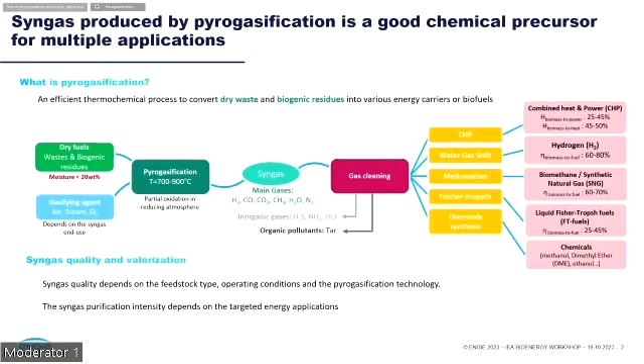Gasification is a kind of super-ordinate term, but a wide variety of different gasification technologies are available on the market. The selection of the technology depends on a number of different factors, and of these, the most prominent are the selection of the feedstock, the end product, and the scale of production.

Fluidized bed, either single bed or dual bed, is used in medium to large-scale applications ranging from around 1 to 100 megawatts. Fluidized bed gasification enables more complex biorefinery processes with downstream gas upgrading equipment, and can produce, for instance, SNG, hydrogen, chemicals, and liquid fuels.

The same is true for entrained flow gasification, which is typically applied at even larger scale, above 100 megawatts. They are more particularly suitable for liquid fuels and chemicals because they produce a high hydrogen content, and also because there is a kind of economy of scale, making them more suitable for higher price end products.

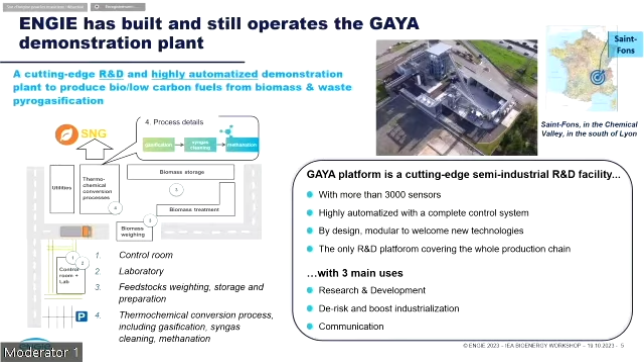So the GAYA project was co-funded by ADEME within the framework of the Call for Expression for Interest and the second generation biofuel demonstrator fund. It gathered 11 partners and was coordinated by ENGIE, and the objective was to demonstrate the bio-SNG production from biomass gasification at the beginning, and at the end of the project, we also performed some tests on waste, such as refuse-derived fuel.

You see the timeline on the right. So basically, we started the project in 2010, and we started the operation during 2018. And we are still operating the GAYA platform, even if the project with ADEME ended at the end of 2021.

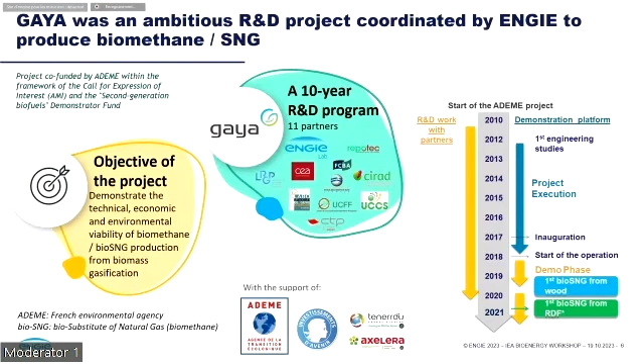Here are some main results. For the technical parts, we have demonstrated the overall process chain, and we have performed more than 150 tests. We have performed long duration tests, so we are confident in this process chain.

Also, we decreased the production cost compared to the state of the art, thanks to several innovations and more than 10 patents. So compared to the state of the art, we decreased the capex by 30%, and also we decreased the feedstock supply costs by using lower cost feedstock and waste. And also we confirm that this pathway has an environmental benefit.

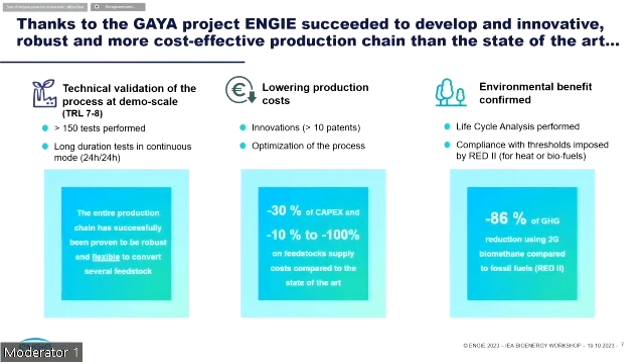For the biomass conversion, you see the number which was assessed and validated by an external panel of experts, and we are doing the same for the waste valorization. So the GAYA project helps to go from the lab concept, and right now we are at the industrialization step.

So the first commercial plant will be the SALAMANDRE project. The capacity of this plant foreseen is 20 megawatts, and you can see here the first sketch of the commercial project. This project will be based in the harbor of Le Havre in Normandy.

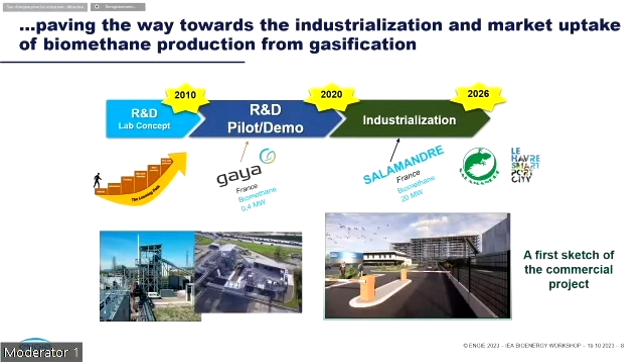So here are some figures about this project. Basically, we will produce 170 gigawatt hours of SNG and also 11 kilotons per year of synthetic liquefied natural gas for heavy and maritime transport, and also for intensive industries around there. And we will co-produce also 40 gigawatt hours of renewable heat that can be used either for industries in the form of steam, and also for urban networks.

And we want to valorize 70,000 tons a year of non-recyclable waste, mainly wood waste and solid recovered fuels. And beyond that, we also want to create synergies and increase the amount of carbon contained in the initial feedstock in the final product.

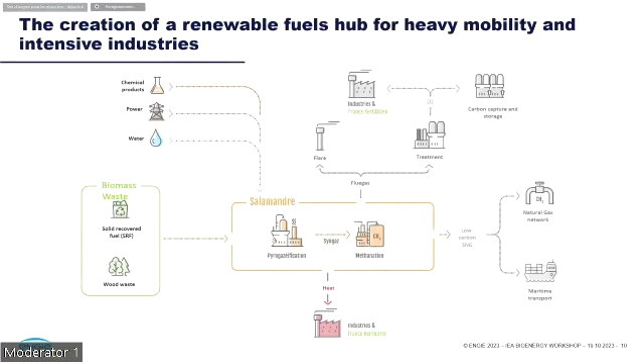So the GAYA platform is still operating, and we are very open, and we collaborate with partners also at European level in order to continue to validate innovative solutions, either for syngas cleaning, catalyst, syngas conversion technologies, and also SNG upgrading technologies. We want to pursue our feedstock diversification.

In particular, we want to address more and more non-recyclable waste. And also we want to diversify the application. So basically we would like to go to hydrogen or co-production of hydrogen and methane. And also I will present you right now a brand new project which was granted this year, coordinated by TNO, in which we are a partner.

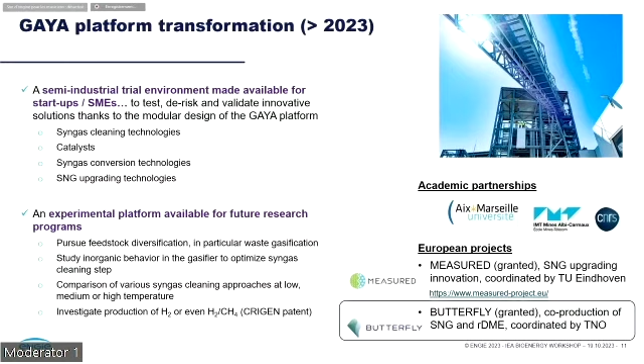So Butterfly comes from biomass utilized to the extended portfolio of renewable fuels with large yields. So the objective of the project, which was launched in July this year, is to co-produce renewable dimethyl ether and SNG, applying, for instance, hydrogen produced from electrolysis in order to produce these two products at a tunable ratio by converting the CO2 coming from the process chain. So we want to diversify also the feedstock.

We will address lignocellulosic biomass, industrial waste, and also upgrading wet organic residues. We will valorize then the RDME and SNG for off-grid energy supply, maritime and heavy-duty transportation, and also for the steel industry.

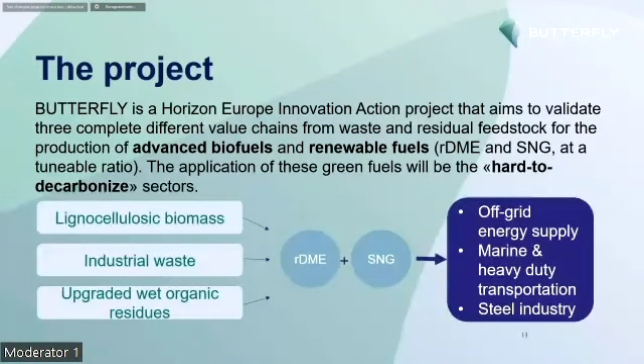So the concept is we will use part of the Gaia process chain with the indirect gasification, the syngas cleaning, and also the methanation. But within this process, we will integrate a new technology brought by TNO called SEDMES, a sorption enhanced DME synthesis reactor. So we will co-produce DME and SNG at a tunable ratio, depending on the demand, for instance more SNG in winter to produce heat, or for other reasons. That's the goal of this project: to study the best optimum in technical, economic, and environmental aspects.

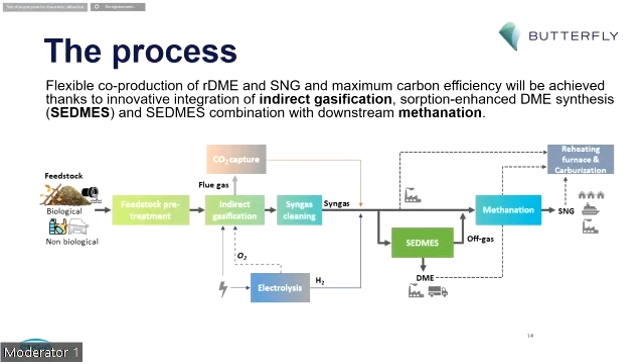So the goals are to improve biomass to fuel conversion efficiency by 15%. We will achieve up to 97% carbon efficiency, and also optimize the synergy of RDME and SNG production.

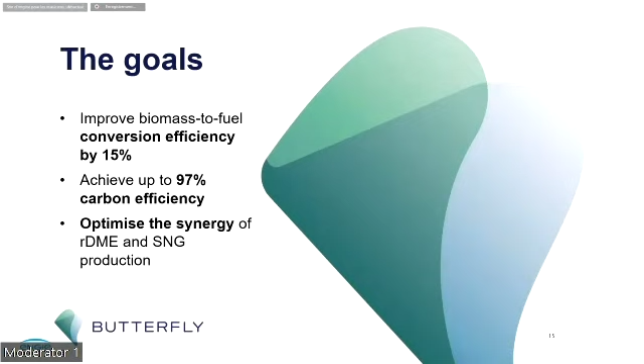Here you can see the different partners of this project. TNO is coordinating, and Politecnico of Milano is also part of it. Lots of partners, either for feedstock supply and logistics, for the conversion demonstration, and also for the final application. For instance, for RDME, DMETA will study the DME market, and some partners will also study DME application in industry.

So thank you for your attention.

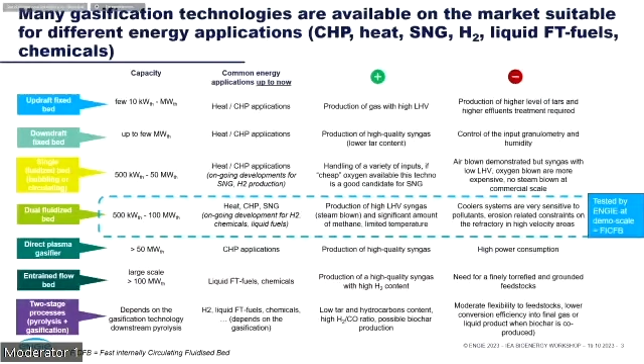Hello, Nicolas Bijon from Solagro. Thank you for the presentation, it's very interesting. I had a question about the use of refuse-derived fuel, both in the Gaia process and in the future Salamandre process, and several questions about that. First, did you achieve sufficient cleaning of the biomethane for injection in the gas network in Gaia? And is it a use that you plan to pursue with the Salamandre project, or are you going to take RDF there? And if so, isn't the RED II directive from Europe a problem for this type of fuel, since part of it is not biogenic?

Okay, so three questions. Yes. So the first one is - basically, if you guarantee a very clean syngas at the end of the syngas cleaning step, then the methanation part won't create any new pollutants. So it's not because we have biomass or waste at the beginning of the process that the final SNG quality will change, because the methanation is a catalytic process. We have to do the main job before the methanation. And yes, we have performed exhaustive analysis on the final SNG coming from SRF or RDF and also waste wood, and we see there isn't any change in terms of quality compared to biomass.

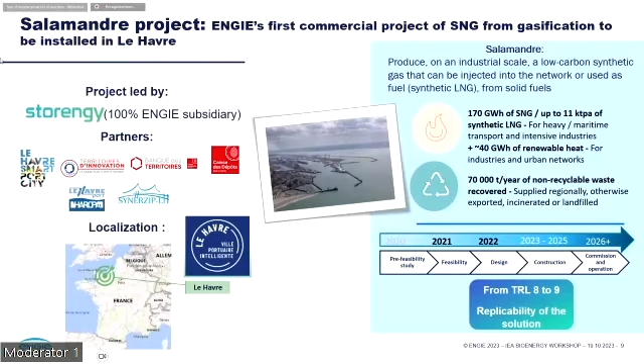Thank you, Marion, and thanks also to all the ENGIE team that will assure tomorrow the visit of the Gaia plant for some of our participants.

So our next speaker is Joakim Lundgren. He is professor at Luleå University of Technology. Besides that, he has several other positions, but I think being the deputy director of CHES is probably an important one also for the presentation he's going to give. He's also the representative of Sweden in Task 33 and in charge of all our activities related to hydrogen production via gasification. The floor is yours.

Thank you very much, Berend, for the introduction, and thanks for letting me talk today, very appreciated. I will discuss hydrogen, which is very hot, but not through power-based hydrogen production, but from biomass and gasification in particular.

Somebody said today that AI is the flavor of the month. I would say that hydrogen is the flavor of the year. Definitely, it's extremely hot, and if you follow the news, there is simply large news on investments and large projects more or less every day. It's about hydrogen-driven trains, aircrafts, new steel plants that will be based on fossil-free hydrogen. I had to put in one of the news on Sweden, where steel making using fossil-free hydrogen is very, very interesting and hot. Now it seems like we're also planning for steel production in Canada using the same concept with DRI. So very, very hot.

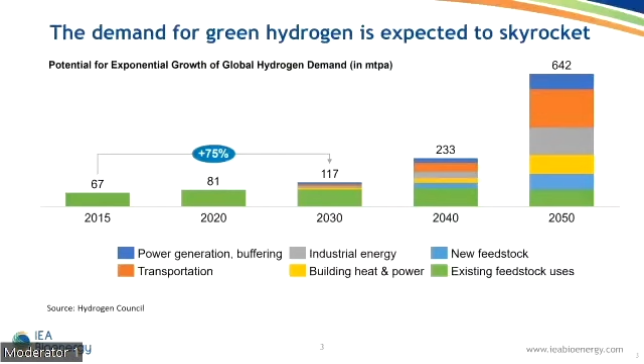So I think there is a consensus that the majority of the production of fossil-free hydrogen will most likely be electrolysis and power-based hydrogen. But I'm a little bit annoyed, if I should be honest, when you directly convert the demand for hydrogen and translate that to how much power you need by just dividing by 0.7, completely forgetting that there are other technologies as well that can supply the hydrogen.

I'm also a little bit skeptical of these colors, different colors of hydrogen. As you can see here, green hydrogen is electrolysis using wind, solar, hydro or geothermal. Gasification is mentioned, but then it's black or brown when you use coal. So if you aim at using biomass, there is no color that fits very well. I would definitely count it as a green one, but it's a little bit unfortunate that it's overlooked — biomass-based hydrogen in general. Today I will focus on my favorite technology, gasification.

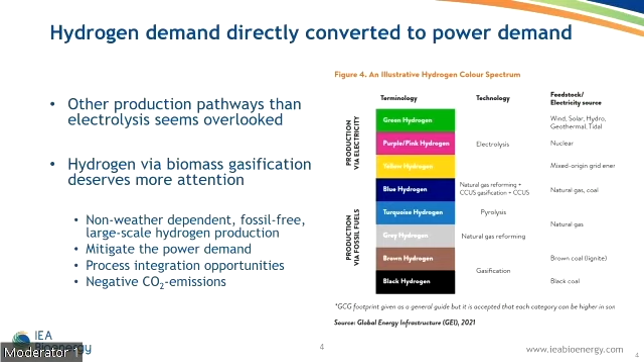So this is what I will focus on today. Marion presented this much better than I could - the technologies for gasification and the characteristics, that it's very flexible in feedstock, but also very flexible on the final product side. So I will simply skip the technical things because Marion already covered it.

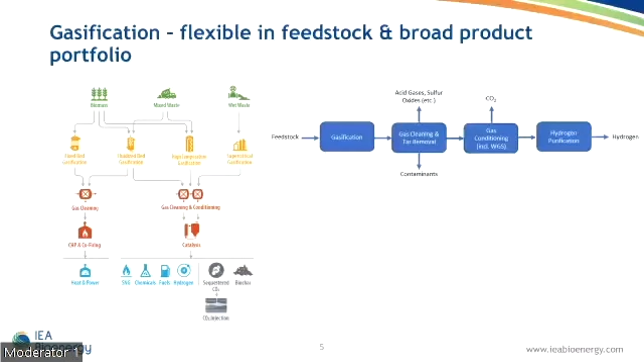This is a very rough sketch of the process for producing hydrogen via gasification. I will not go into details here, but I think most of you are aware of the processes needed. You need to get rid of some nasty stuff that we don't want, like acid gases and sulfur and other contaminants like particles. Then you need to make the gas a little bit better by conditioning, and also remove the CO2, very important, and then purify it with, for example, PSA to get a high quality hydrogen stream.

But important here, a very rough mass balance is that if you gasify 1 dry ton of biomass, you can produce around 100 kilograms of hydrogen. At the same time you produce 15 to 20 kilograms of CO2 per kilogram of hydrogen. So these are very, very rough balances.

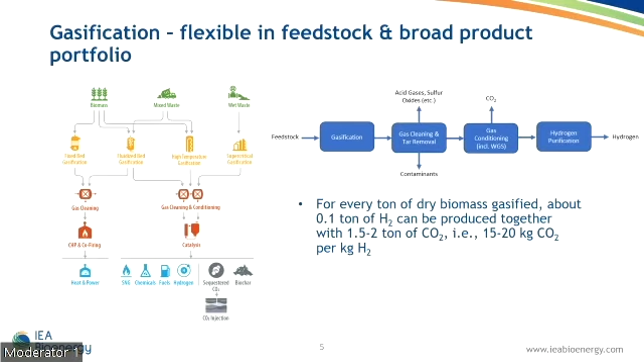And I will not focus on the technical things now on producing hydrogen. I will more be focusing on economics, which I think is quite interesting actually. And I've used an IEA Bioenergy publication. I don't know if there are co-authors, but I know that people in this room have been involved in this report.

This report doesn't include hydrogen, but it's a relevant assumption to say that the production cost for methanol and methane via gasification will be roughly the same as gasification-based hydrogen. It won't differ that much. In this report, they presented production costs for these commodities with different scenarios, one higher cost and one lower cost. I also took the freedom to extrapolate with different feedstock costs. I think the last time I checked feedstock cost for biomass wood chips, it was around 25 euros per megawatt hour, something like that.

Competing with fossil-based hydrogen is not easy. This is rough cost for hydrogen produced today via steam methane reforming, somewhere around €1 per kilo up to maybe €2 per kilo, somewhere there. And what we can see is that at current conditions, it will be very difficult for biomass to compete with this.

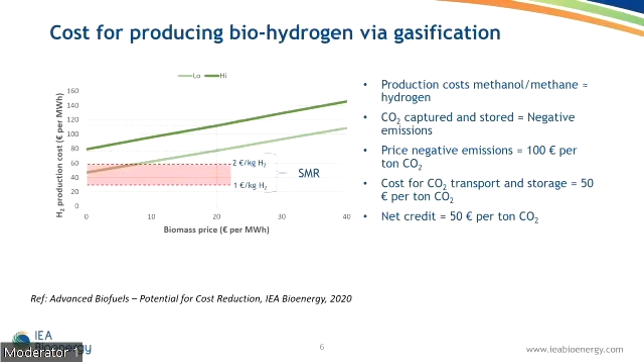Using the numbers I presented before, it means we can push down the production cost quite significantly. I have now compared with SMR coupled with CCS to make it a little bit more comparable. What we can see then is that it's becoming improved. Following the high cost scenario, it will still be difficult. But with the low cost scenario, according to the IEA report, with feedstock prices that we have today, it actually starts to become feasible.

Even though I don't think it's perhaps extremely fair to compare these two costs.

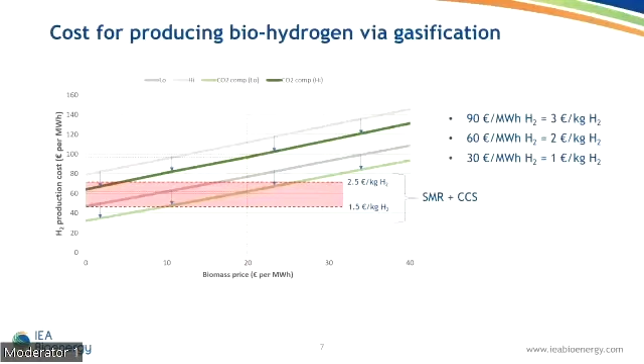And it's exactly the same, not only with green hydrogen, but green technologies in general. They need support before they can compete with fossil alternatives. So that's, I think, an important message.

So what about competing with power-based hydrogen? Well, according to my calculation, this is also from IEA Hydrogen, on the estimated cost for solar and wind-based hydrogen 2040 to 2050. And if I put in my estimations of gasification-based hydrogen, it's somewhere around in this span, $2 to $3 per kilogram. And what you can see here is that in the Northern Hemisphere, it's competitive also to power-based hydrogen. So I think this is actually quite promising also from an economic point of view.

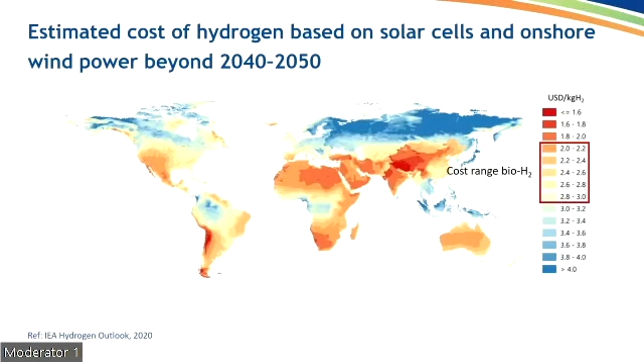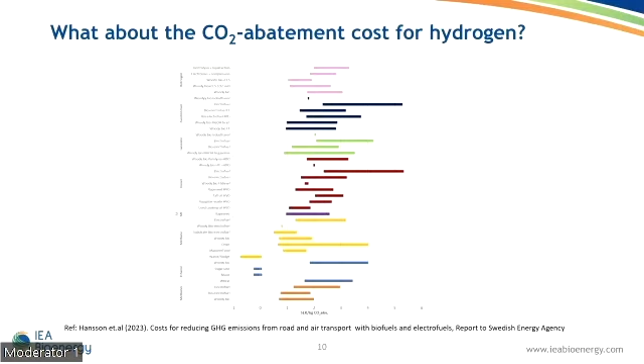We have also calculated the CO2 abatement cost for a large number of transportation fuels, including aviation fuels. I will not go into detail here, but this is the hydrogen cases. And as you can see, they are comparable with most other biofuels, electrofuels, and bioelectrofuels. Zooming in, I just want to show that according to our assumptions, the CO2 reduction cost is actually lower for the gasification cases than for the electrolysis cases.

This is in Swedish crowns, so you have to divide by, well, almost 12 nowadays, to get euros. But so also from this perspective, it's actually interesting.

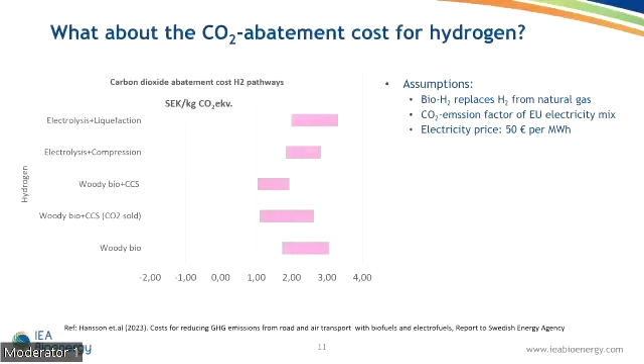To summarize, I think that gasification brings many attractive technical benefits, environmental benefits, and also, as I showed, economic benefits compared to many others. Like I said, it's also difficult. Sorry, how do we go? This one. It is difficult to compete with fossil-based hydrogen today.

But I also think, I didn't mention, that the development of CCUS in other applications than gasification will sooner or later lead to lower capital cost, which means that gasification will also benefit from that and become more competitive. Perhaps it's also possible to apply this in smaller scales. So this is very good for gasification.

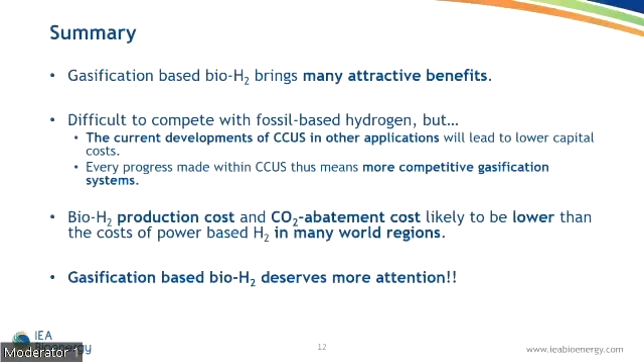According to my estimates, we see that both production cost for biomass-based hydrogen and CO2 abatement costs might actually be lower than the cost for power-based hydrogen, especially in the Northern Hemisphere, many regions. So it's not a silver bullet, but it definitely deserves more attention. So this is where I will stop, and thank you very much for your attention.

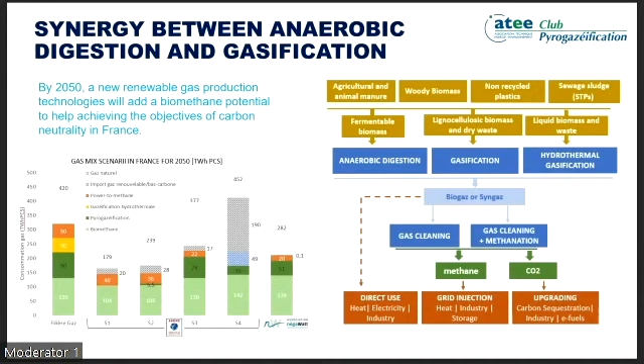Okay, thank you. First of all, forgive my bad French accent. I'd like to say first, as part of our strategy, we aim to provide greener logistics services. And the supply of renewable electricity and renewable gas, I think, is a key factor of our success.

There are 20 hectares, and 6 hectares are available for the project. What is important for this site is that it's near the harbor of Montoir and Saint-Nazaire, and there are two gas networks next to the site—the main gas network for transport and for distribution. So it's an advantage for us.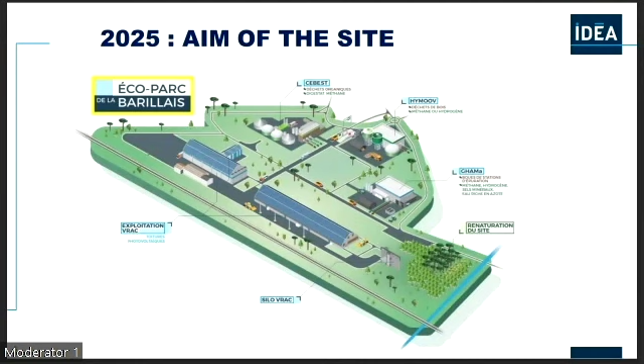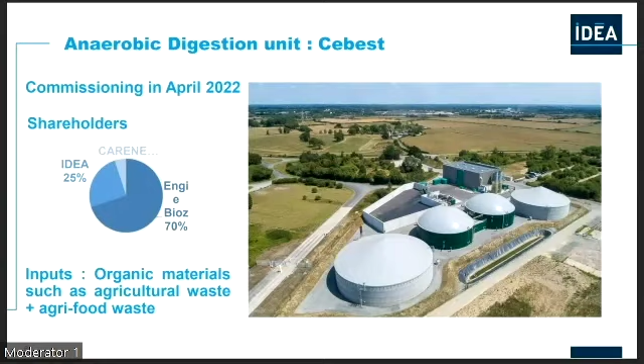What is important to retain? It's a local unit, local project. For example, the input comes from a radius of 20 kilometers around the site, around the unit. And for the digestate recovery returning to soil, there are 12 farm operations, and they are within a radius of 25 kilometers around the unit.

We are authorized to process 28,000 tons each year, and that will produce 21 gigawatt hours each year. The flow rate is about 250 cubic meters per hour.

And for the digestate recovery, it's around 25,000 tons each year. At the end of the year, we will be commissioning a CO2 recovery unit, and this liquefied CO2 will be used in a greenhouse to grow vegetables. For the anaerobic digestion unit, it's about 500 tons of CO2 equivalent. It allows us to avoid 5,000 tons of CO2 equivalent.

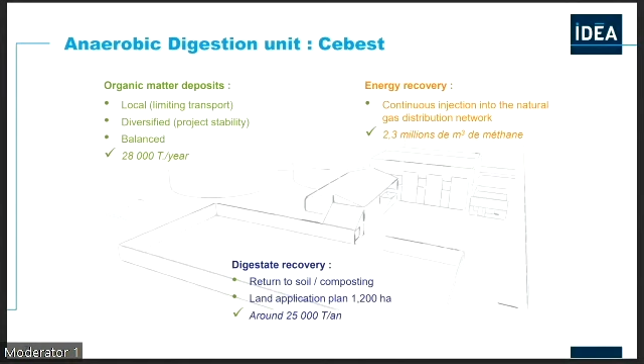The next project is a gasification project. Do you know that there are 3 million tons per year of industrial wood waste in France? Only 50% of this waste is valorized in France for wood, and the rest is buried in landfill.

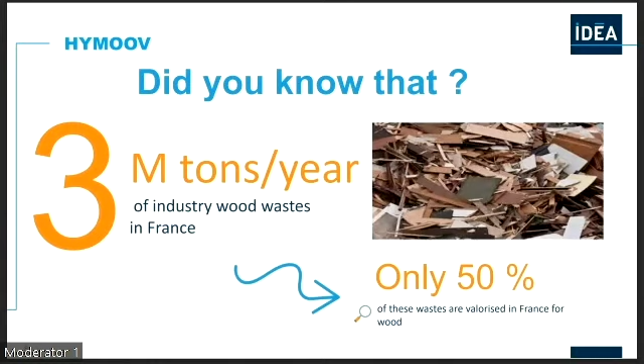We saw this morning several times, but it's important to repeat it: France is aiming for carbon neutrality in 2050 with strong objectives on waste recovery rates. So we decided to create HYMOOV. It's a joint venture with IREMIA and my company. IREMIA is a little company specialized in wood treatment. The aim of the unit: the input is wood waste, about 20,000 tons each year.

I will not focus on the process in detail, but I will say it's a high temperature process that breaks down the molecules, and we obtain methane, hydrogen, carbon monoxide, and carbon dioxide. We clean the gas, and we mix the molecules together to obtain methane. But if we want, we can obtain hydrogen with another process.

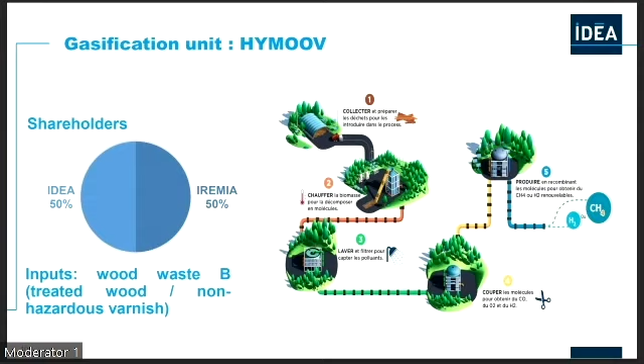The next project is a hydrothermal gasification unit called GHAMa. GHAMa is a consortium with GRTgaz. GRTgaz is an operator of the main gas network. LLT is a main actor in the engineering process in HTG technology, and it works with KIT in Germany. NEVEZUS helps us in plant operation, and Cerema helps us deal with the authorities, especially with regulation.

And Carene furnishes the entrance — it's not the wood, sorry, it's wastewater. Carene has a wastewater plant just near the plant.

So GHAMa is the first industrial demonstration project in France, currently under planning, with commissioning scheduled for late 2024, early 2025.

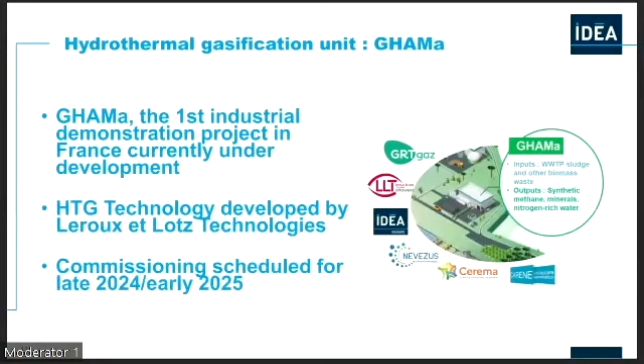What is in it? I will not describe the process in detail, but what is important is that the input must be pumpable. The capacity, since it's a demonstrator, is small: about 1 megawatt hour of gas injectable per hour. And unlike gasification, we have minerals and metals in outputs, and water rich in nitrogen. The plant surface area on site is only 1,000 square meters.

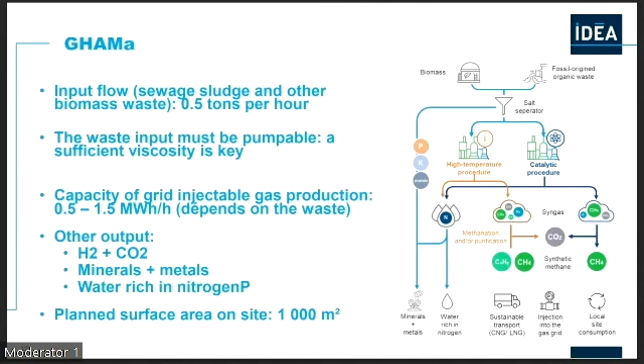As I said, it's only 1,000 square meters. High energy efficiency, and this technology allows us to get rid of bacteria, viruses, and pathogens. Very favorable GHG assessment environmentally, and low odor and noise pollution. The last point is very important in the environment of the site for people to accept this kind of facility.

And the last thing, what is very interesting with these three projects is the synergy. We can use, for example, waste heat from the thermal gasification to heat a product for the anaerobic digestion unit. We can use the digestate from the anaerobic digestion unit for the thermal gasification, and we can share some equipment, such as a weight bridge.

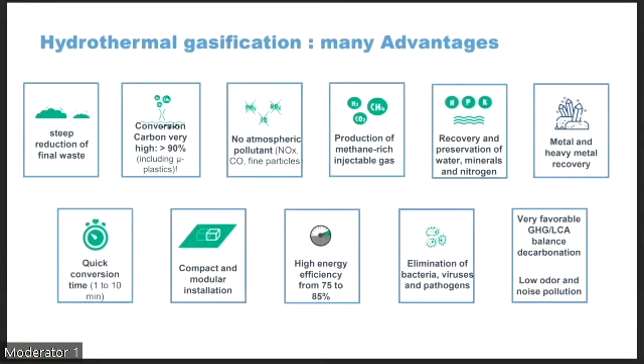Okay, my question is about the operation condition of the hydrothermal gasification. If it is gasification, the temperature should be high, but then how can you produce methane? The temperature is not higher than thermal gasification, the classic gasification. The difference is that you have a solvent, and for hydrothermal gasification, the solvent is water. Yeah, I know, but usually if it's gasification, it should be 500 degrees plus or something, and then it says you can have injectable gas, which means a lot of methane, which you don't get above 500 degrees.

So it's about the heat that we produce from the gasification process, what we do with the heat that we produce from the gasification process. This is the question. Equilibrium does not allow you to produce a lot of methane above 500 degrees. So here it says on that slide, you have injectable gas. You produce methane somewhere, but how do you do that at 500 degrees? Actually, you produce methane as in gasification, at high temperature, but then you cool it, because you also do a methanation step. That's how you get methane in a condition suitable for grid injection. So it's not really a contradiction, and yes, the heat, you recover it during the whole process.

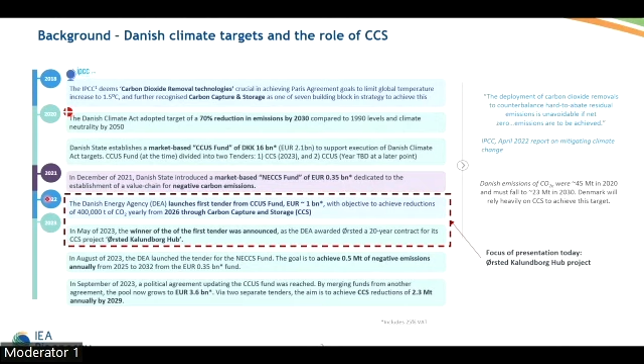This project had to be up and running by January 1st, 2026 as a minimum. And in May of this year, the winner of the first tender was announced: the Danish Energy Agency awarded Ørsted a 20-year contract for its CCS project entitled Ørsted Kalundborg Hub, which is what I'll be speaking about a little bit today.

Quickly, just a little bit about Ørsted for those that may not be familiar. They develop, own, and operate a number of energy assets, both within Europe and globally. They're a global leader in offshore wind. They have a strong presence in onshore renewables in the US and throughout Europe. They have a number of thermal power plants, primarily in Denmark. And they have an ambition in 2030 to be a global leader in renewable hydrogen and green fuels.

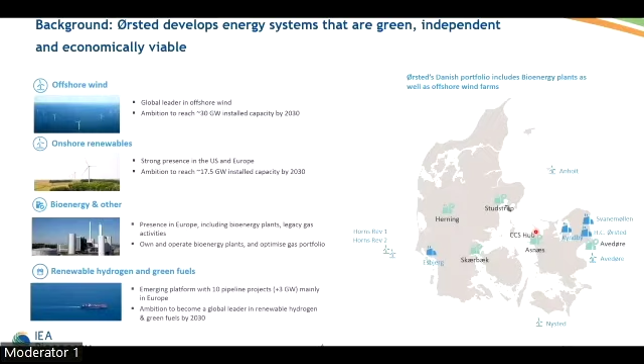If I just direct you to the Danish assets here, we have the Avedøre power plant on the eastern coast of Zealand - it's a CHP plant. And we also have the Asnæs CHP plant on the west coast of Zealand. These are the two assets that will be involved in this Ørsted Kalundborg Hub project.

Now, the four major partners in the project are: Ørsted, who'll be responsible for the entire CCS value chain - construction has already started in June of this year, and they'll be aiming to capture and store 430,000 tons of CO2 a year by 2026, with some of the first capture taking place in 2025. The capture units will be delivered by Aker Carbon Capture. The sea transport, sequestration and monitoring will be undertaken by Northern Lights. And the off-taker for these negative emissions will be Microsoft, which is a large contributor in terms of the economics of the project.

If we zoom in on the project a little bit more, at the top of the diagram here is Avedøreværket. Avedøreværket actually has a number of different units, but the unit that will have carbon capture applied to it is a straw-based unit. There'll be two capture units applied to this, with the intention of capturing roughly 150,000 tons of CO2 a year. After capture, the CO2 is then compressed, liquefied, and then will be transported, at least initially, by truck across Zealand to the intermediate storage at the Asnæs site.

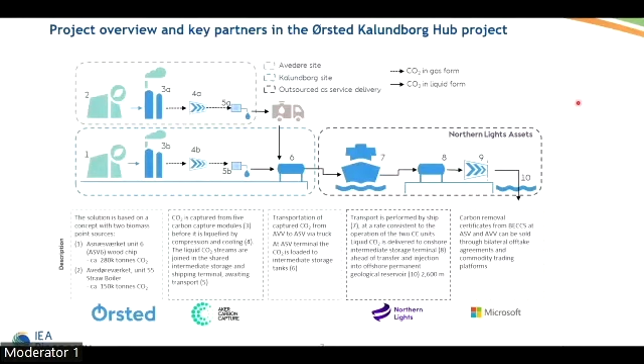In terms of choice of technology, having to be fully up and running by January 1st, 2026 is a very tight deadline, especially for one of the first of these large-scale projects. So there was a lot of emphasis placed on low-risk technical solutions. The first aspect is the carbon capture plant, which comprises capture, compression, liquefaction, and intermediate storage. These last three components are relatively widely deployed technologies, and as such, this wasn't really the core focus when selecting which technology to go with. It's the carbon capture units that are most complex and also require the most energy. So in this particular project, Ørsted decided on a standard modular technology based on amine absorption, and this was done for three primary reasons: to ensure certainty of cost, maintaining the timeline, and good performance.

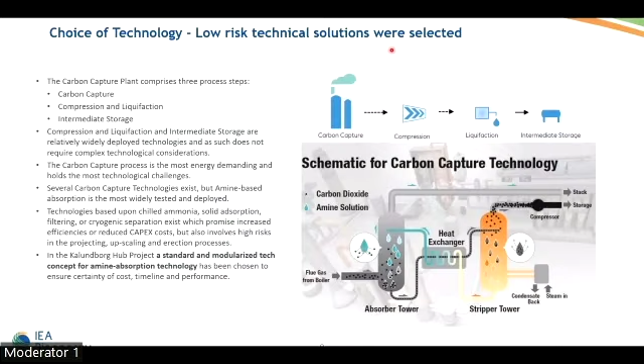So if we turn to Northern Lights, here there's a better illustration of their concept with their ships, which will deliver the CO2 to the receiving terminal, store it here intermediately, and then pipe it 100 kilometers under the sea before it's sequestered a little over 2.5 kilometers under the seabed for permanent storage and monitoring.

So why Northern Lights? Norway has been safely storing CO2 deep in the North Sea for over two decades, and Northern Lights is part of the Norwegian government's full-scale carbon capture and storage project, the Longship. Particularly relevant here is that the storage complex known as Aurora is meant to start operations in 2024, giving Ørsted a good buffer for the first captured volumes coming in 2025 and full-scale implementation in 2026.

And lastly, and certainly not least important, Northern Lights has a lot of focus on monitoring, both during transport, during injection, and post-injection, to ensure there's no leakage and that the CO2 is being permanently stored in the desired fashion.

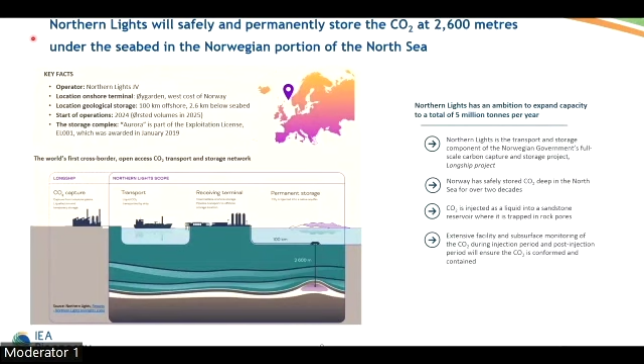A very important aspect of this project is that the CO2 emissions being captured are biogenic in origin—it's residue biomass used in both power plants. This means they will create negative emissions, and these negative emissions can be converted into high-quality carbon removal certificates.

This was a focus of interest for Ørsted. They wanted very high-quality, top-of-shelf removal certificates, and this was something the Danish Energy Agency was interested in, as was Microsoft. To ensure this, they'll be certified according to internationally recognized standards. In fact, the project has been chosen as a pilot project for the first CCS certification of BECCS projects.

Also tied to this—the Danish Energy Agency had some very stringent criteria—is that a very comprehensive MRV, that is monitoring, reporting, and verification system, has to be in place. This is something Ørsted has been working a lot with and will continue to work with throughout the course of the project.

So to summarize their approach to carbon removal certificates: essentially, they have to be certified according to recognized standards, they can only count once towards global emissions, they must deliver additional climate action, and they should only be utilized after all other climate action has been undertaken.

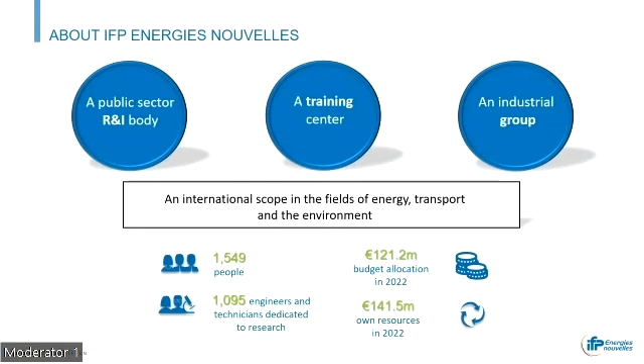So we consider that in 2030 we have more or less 4 main pathways for the production of sustainable aviation fuel. The first one is hydrogenated vegetable oil, so for sustainable aviation fuel we are speaking about used cooking oil and animal fat mainly. The second way is biomass to liquid, or e-biomass to liquid. I will make a focus on this way at the end of the presentation. The third one is alcohol to jet, mainly ethanol, so we are producing ethanol and after we have the conversion of ethanol into jet. The last way is e-fuel, which could be considered a little bit less in time of market in order to produce some e-fuel.

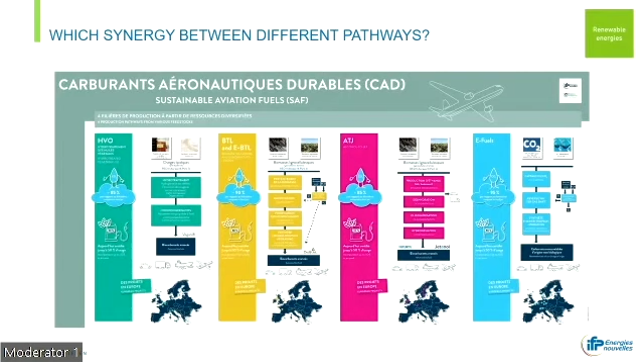I will focus mainly on the third way, the ethanol production. So just a sample scheme to explain the production of ethanol from lignocellulosic biomass. After a kind of pretreatment, you are making hydrolysis and fermentation. The hydrolysis is done by enzymes. With this enzyme we take the different sugars you have in the biomass, and after that the yeast will make the fermentation of this sugar to produce many products: ethanol, CO2, and also lignin, which is a biomass product. This is not only ethanol, it's an energetic hub as you are producing many products.

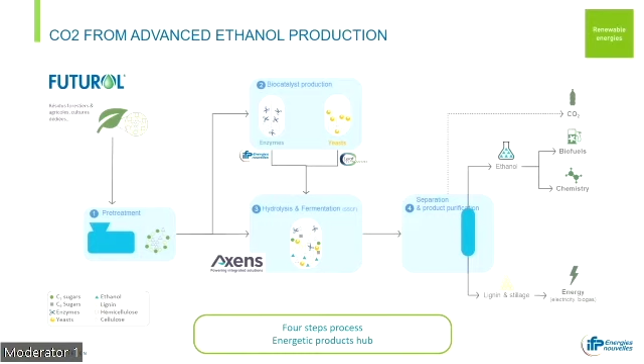Let's put some figures on this scheme. I take some rough example. We are considering a unit of 150 kilotons per year of biomass, and considering a mass yield of 20% which was estimated for the mass yield, we are producing 30 kilotons of ethanol. And if I go back, I said that the ethanol is produced by fermentation of sugar. So if I take the right chemical reaction of sugar for production of ethanol, we see that we are producing 2 moles of ethanol and 2 moles of CO2. That means we have the same amount in terms of mass produced as CO2. So you have 30 kilotons per year of ethanol, and we have about 30 kilotons per year of CO2.

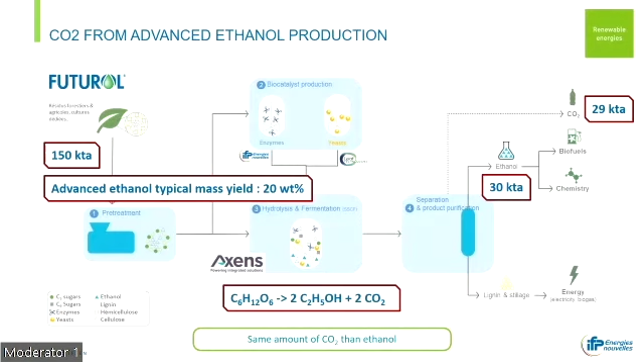This CO2 is mainly used for e-fuel production, and is really a kind of source. I just made a quick scheme about the e-fuel. So we are taking the CO2, atmospheric, biogenic or fossil CO2. The biogenic CO2 is more interesting for us in the next years. If we are going from atmospheric or from industrial sources, it's necessary to make CO2 capture. With this CO2 we mix with hydrogen and we make a reverse water gas shift in order to produce a syngas. And after the syngas we can make Fischer-Tropsch synthesis. I take this example of Fischer-Tropsch synthesis, but you can make other products with the syngas, just to explain the link we can have between ethanol and e-fuel units.

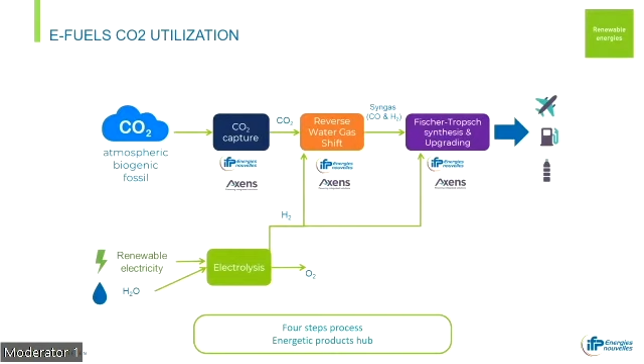I take the same amount of CO2 we are producing by the ethanol units, so about 30 kilotons per year, and I make the same quick mass balance on the reaction to produce a sustainable aviation fuel. I take a molecule with 12 carbon number, and considering 100% reaction, just to have some order of magnitude on the rough estimation, based on the 30 kilotons per year of this CO2, we are able to produce about 11 kilotons per year of sustainable aviation fuel. So 1/3 of the CO2 entering the process, you are producing SAF. For that you need some hydrogen. The same reaction says we need about 4 kilotons per year of hydrogen, which is about 200 gigawatt hours per year of electricity, renewable electricity.

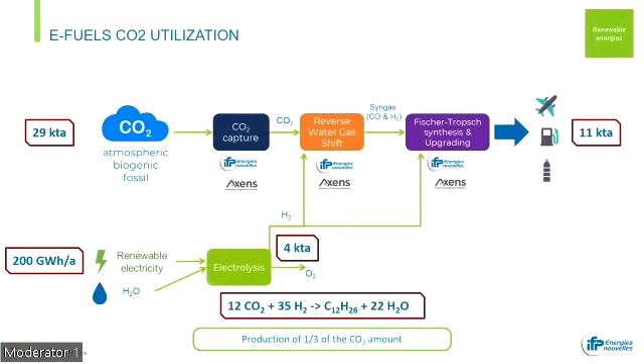So I make the combination of ethanol and e-fuel just to synthesize the two pathways. The first one, if you are producing only ethanol, we have a mass yield of about 20%, so an energy yield about 37%. If I use this CO2, which is a byproduct not used for ethanol units, we're able to increase the production of product of interest. In this case I put sustainable aviation fuel as an example, and we are increasing the mass yield, based on the lignocellulosic biomass we are introducing, to 27%, so 7% more product. And the energy yield is about 45%, taking into account the electricity we need for the e-fuel pathway, so it's e-fuel electricity plus lignocellulosic biomass energy content.

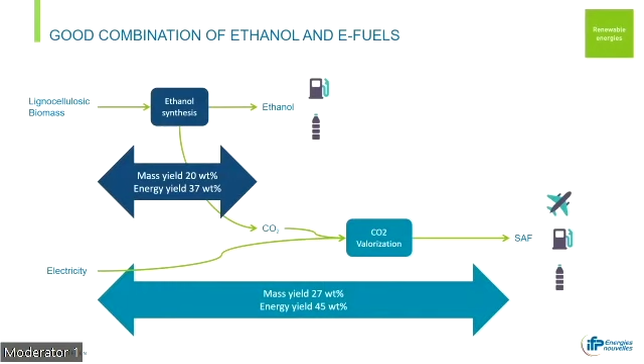Another example, not exactly the same as integration between the two processes, but think about the BTL pathway. The order of magnitude is 20% of carbon mass yield. So for the production of 30 kilotons per year, we use about 150 kilotons of lignocellulosic biomass.

But in this reaction, we need to adjust the ratio of hydrogen to CO for the Fischer-Tropsch reaction, passing from 0.6 at the outlet of the gasifier to 2 at the inlet of the Fischer-Tropsch. For this, we need a water gas shift unit, using CO with water to produce hydrogen and increase this ratio. But the counter effect is that we also produce CO2, about 115 kilotons per year.

So you could say, okay, I'll use the CO2 the same as with ethanol, and make an e-fuel unit. But if I make an e-fuel unit, I'll need a reverse water gas shift, an electrolyzer, and also a Fischer-Tropsch unit—but I can share this Fischer-Tropsch unit with the existing one. So it's not the main point.

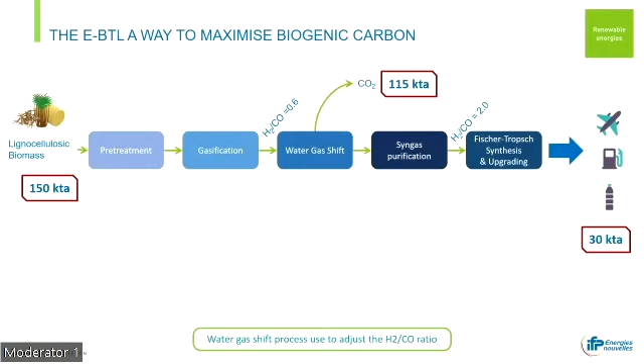What could be done instead is to avoid producing this CO2 in the first place. How can we do that? We can adjust this ratio directly by putting hydrogen into the unit. So we'll have the electrolyzer, and put hydrogen directly, about 11 kilotons per year, into the syngas coming from the biomass, increasing the ratio from 0.6 to 2.

In this case, we are doubling the production because we are using all the carbon, maximizing the biogenic carbon content of the biomass in the final product. So it's not exactly a way to use CO2 from the BTL unit, but a way to avoid CO2 and maximize the production of sustainable aviation fuel. It's also interesting to see how we can integrate different processes and use them to maximize the carbon content of biomass.

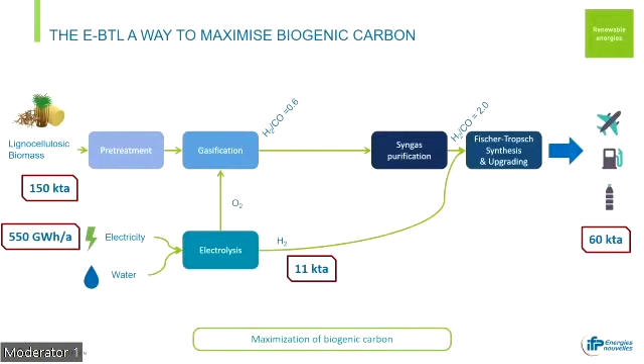So this is my last slide. We have different pathways for producing advanced biofuel. I explained some, but if you're looking at hydrogenation of vegetable oil, you can also have synergy and integration between this process and the e-fuel process.

We are ready for deployment. When we have the unit in operation in the next 5 years, I want to say we are able to make this kind of integration at industrial scale.

Advanced biofuel is a source of biogenic CO2, and we need this CO2 to address the amount of sustainable aviation fuel required by the regulation. I take only this example. We need to integrate the different processes, so that's very important, and when you have the know-how of the different processes, you can do that.

It's very important. I've only given an example about CO2, but as we said before, we can also make integration between different other streams in the unit in order to reduce the CAPEX, reduce the OPEX, and increase the energy yield of the process, at maximum use.

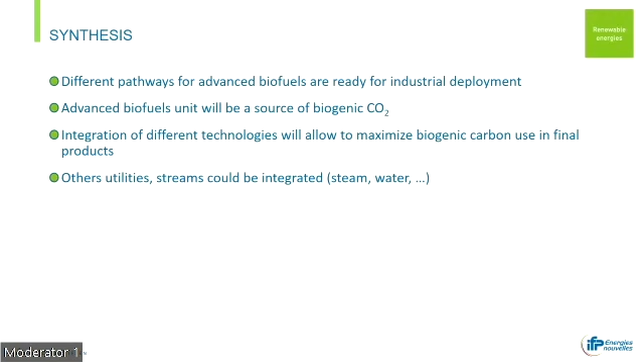Very interesting presentation. I guess there are some questions about this. It was clear, yes. Yes, Luc.

Thank you, very interesting initiatives also. Do you know already something about the economics of introducing hydrogen in the process? And is it worth the extra yield that you get at the end to do that? So how does it come out in the business case for you?

The cost of hydrogen is the cost of electricity, depending on the different scenario. What's important is two points: you need to keep the life cycle assessment in mind, which is very important, so you need renewable energy. And for increasing liquid product at the end, it's something very sensitive in terms of economics. For sure, hydrogen is important in the OPEX, but it's manageable, and some new developments in hydrogen production to reduce the cost are also expected in the next years.